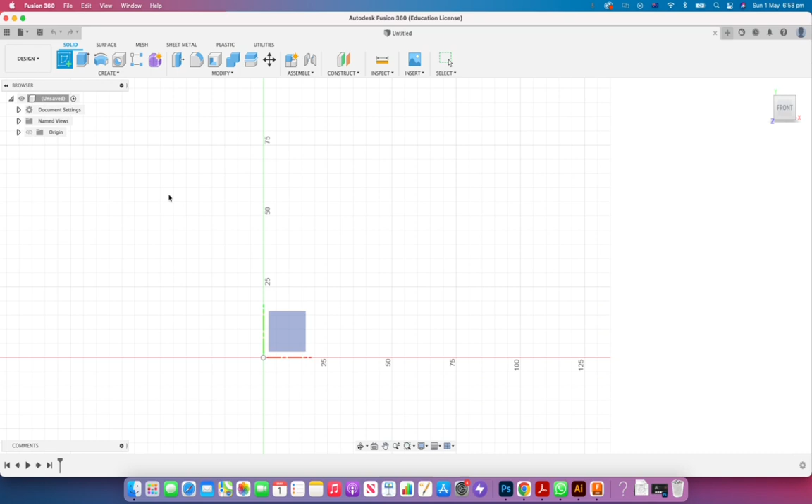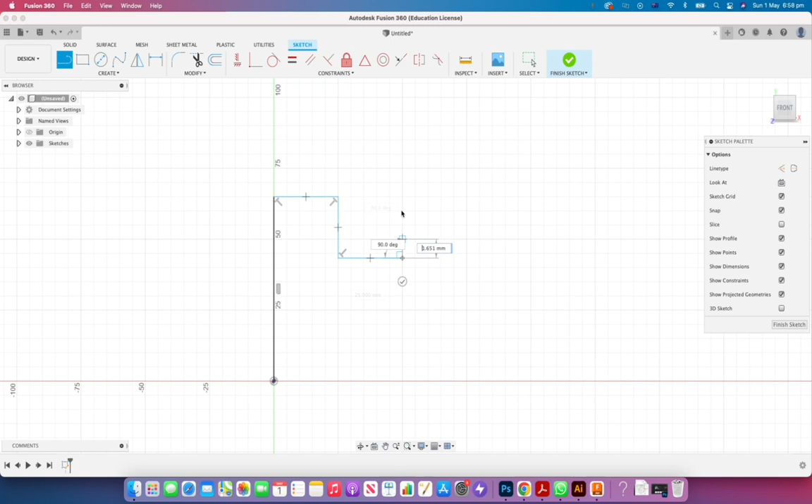All right, so let's create a line here. I'm going to create a sketch - waiting for Fusion 360 to catch up. That's better. Pan down. With the line tool, let's create the shape for our initial piece of geometry, which kind of looked something like that.

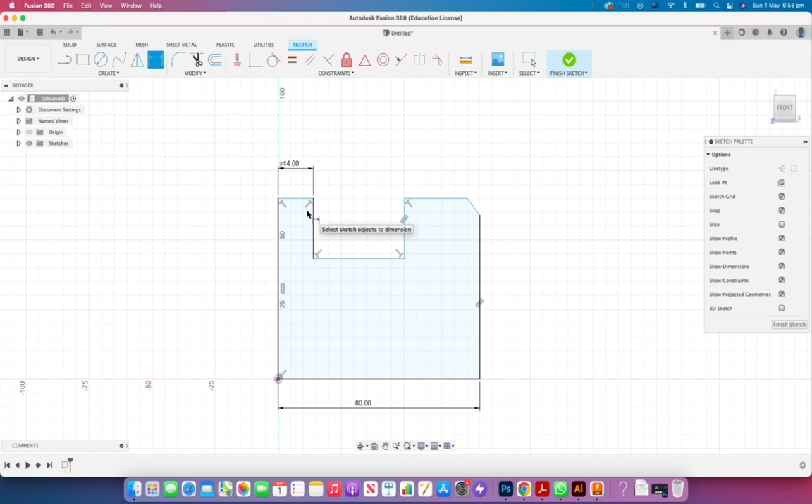Now I'm looking at my sketch with my dimensions on here, and using the D key, which switches me to dimension mode, I can see that this dimension down here was supposed to be 80, this one up here was supposed to be 14, the dimension between these two lines was supposed to be 20, and the dimension here was supposed to be 18. I know that the total height of the block was supposed to be 60.

I'm going to make this and this point here a coincidence, so that's basically the same height as that. Let me undo that - what you saw me do there was choose this line, hold down the shift key, choose this point here as my reference, and make that coincident so it constrains the two points together like so.

So if I then had to change this value to 70, let's see what happens. You can see that it follows. So I've basically created a relationship between this and this point here.

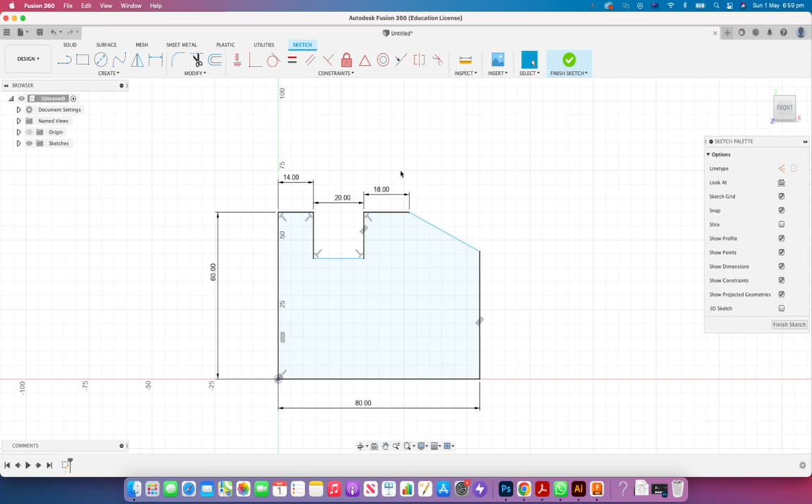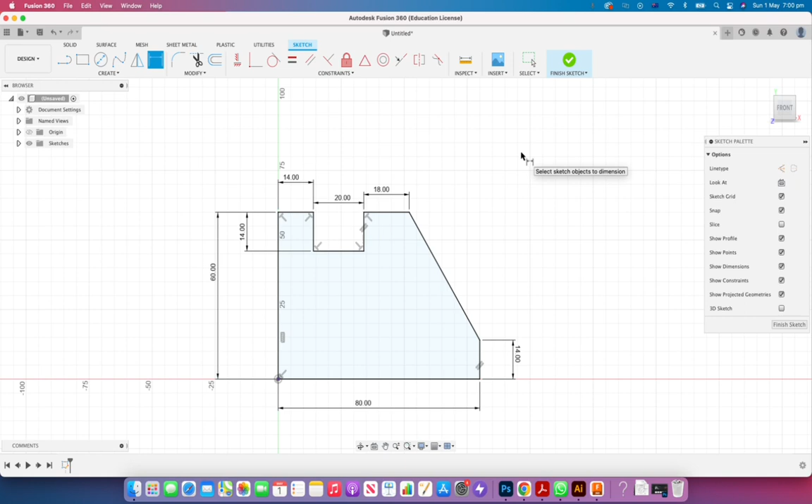Anyway, that should be 60, and then this dimension here should be 14. And we've got one more dimension that we're missing here, between here and here, which should be 14 also. All right, so everything is black, which means it's fully constrained, fully defined, so I can now finish the sketch.

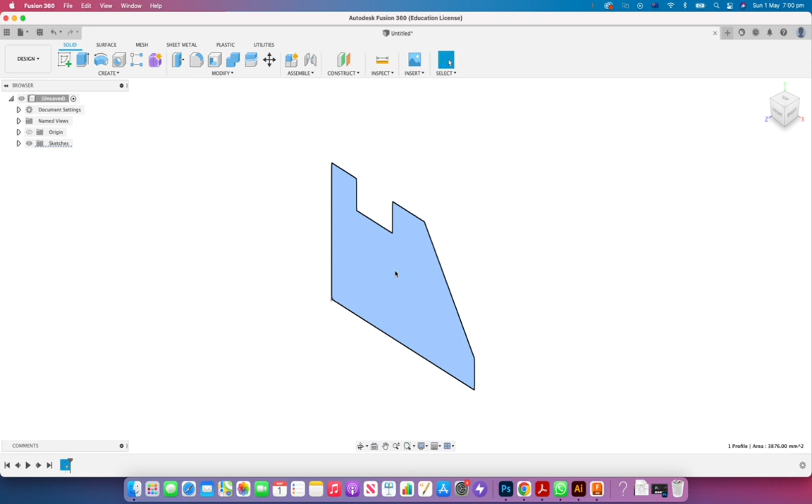So there we have it. I'm going to select that surface there, if you like. Okay, let's go and extrude here.

So we're clicking on this tool here, and we're going to type in a value of 70 millimeters, I think it was. I'm just going to hit enter there. Let me double check. Yes, it was 70 millimeters.

So let's think about this for a moment. This is what I'm going to do. So I've got the 6 and the 24 - they're my numbers that I need to remember.

Alright, so I'm thinking I'm going to draw a sketch on this top face, if you like. So I'm going to select that top face and let's pick up our sketch. And I'm going to draw a rectangle. Now, here's my rectangle. I'm just going to place it something like that at this point in time.

Now, the first thing I want to do is reference with the dimension, so I'm hitting D on the keyboard here. How far from here to this line is it going to be? I'm going to say it was 24.

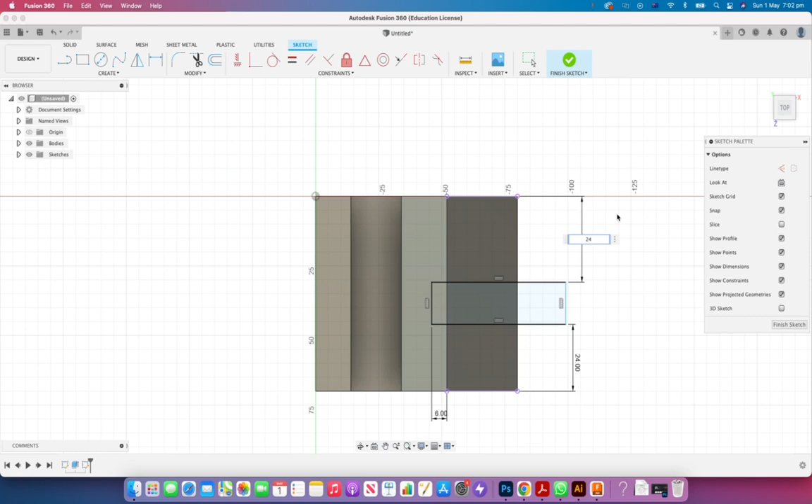Then the next thing that we need to do is basically do a reference from here to here, and guess what, that is going to be 24 also. Let's finish the sketch. Alright, so this is what we have - we've basically got this guy here.

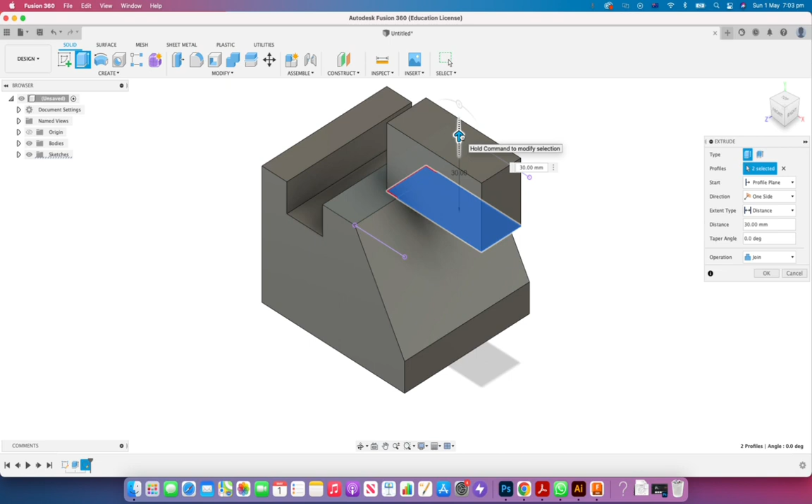So what I'm going to do is hold shift down here to select both of those. I'm going to go to extrude, and rather than pulling this up, which would create a join, I'm actually going to pull this through. The intent is that the extent type is going to be going through all of the object as a cut, and I'm going to click OK. And there you have it - that is the object, the angle stop, that we've basically modeled from this part here.

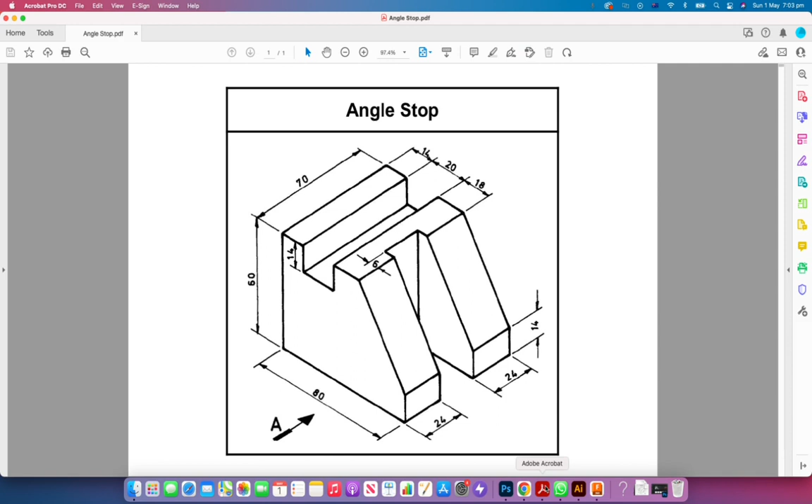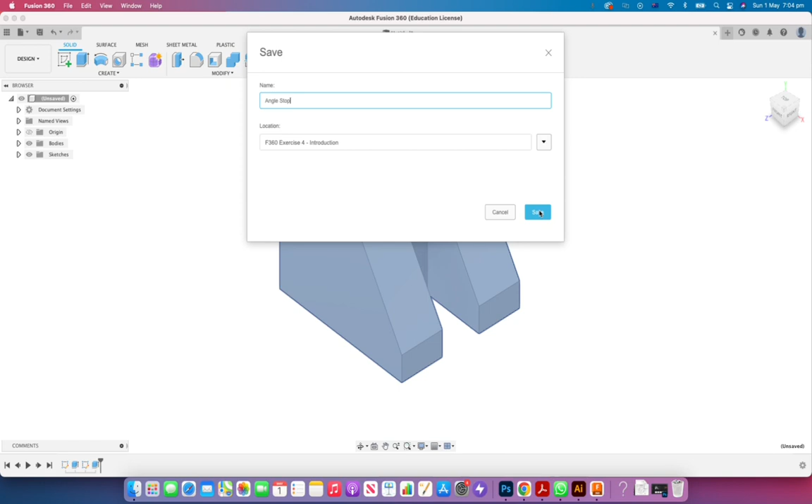Just jumping back - what I should do here, guys, is just sort this out in terms of saving this. So I'm just going to go File, Save. We're going to call this the angle stop. You can see that I'm saving it into my Fusion 360 introduction folder. I'm just going to hit Save on that, which will give this a name here.

Now, what I was going to do, or show you here, is putting a material on this. Let's right-click, Physical Material. Our physical material library is going to open. We're going to go into metals here. Let's just scroll down and find aluminium, just the basic aluminium. We'll throw that on there.

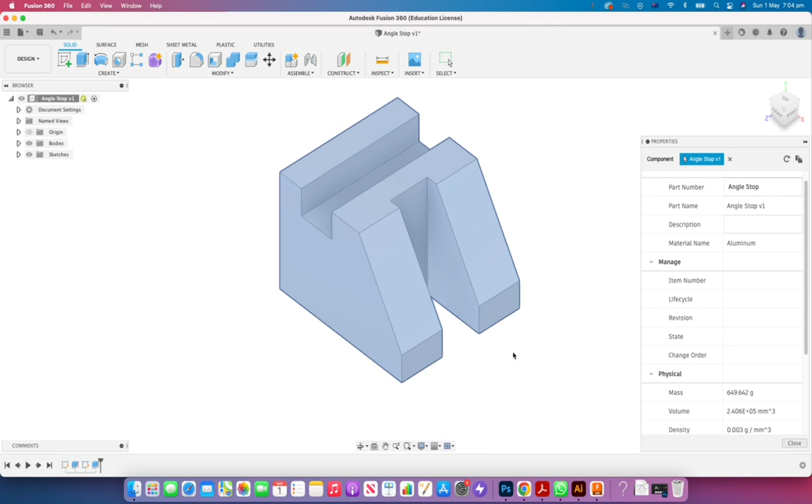We can also check that out if we add that material also. So have a little go at working through that process of modeling the angle stop using the drawing that's provided to you. Hopefully you end up with the same value that I have there as being my mass. If you've done that correctly, then we should all have the same mass.